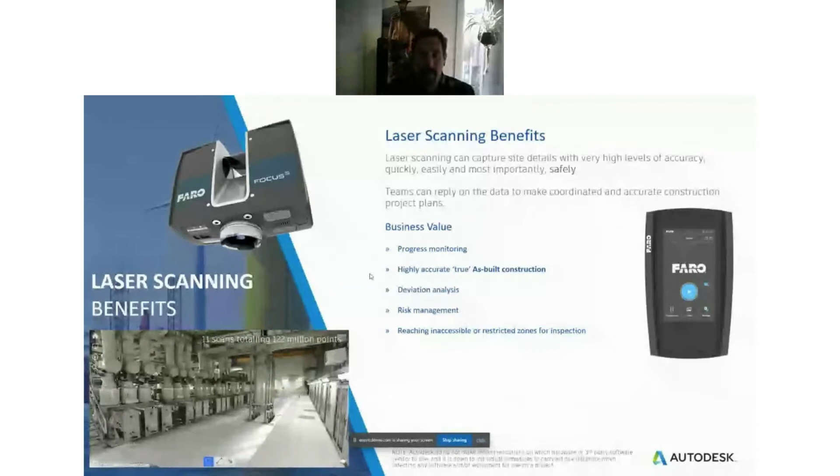Laser scanning, I do a lot of that myself. I've been doing that for years. Very, very accurate. So if you want to do design versus as-built accuracy, laser scanning is key for internals. But it is time consuming, not as time consuming as traditional survey methods by any means, but you're talking 4 to 8 minutes a scan. And then you have to stitch all those together, and it creates huge amounts of data that you then need to process. But again, right tool for the right job.

That is super efficient. The other thing is I don't have to be on site to do that survey. I can be outside of the site, therefore I don't need to do a site induction. I don't need to go through all the safety protocols, high vis, or having a responsible person go around with me. I don't need a surveyor to go with me as long as I know where the ground control points are, so I can do it remotely. So it's not only time saving, but it's also improving health and safety, and you can see the business benefits there.

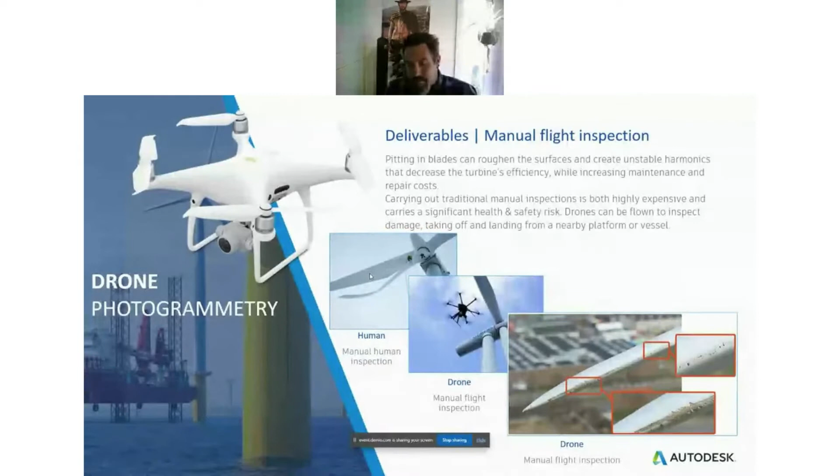A benefit of DroneDeploy and software like that is I can pre-plan a flight before going to site, and simulate it to make sure it will capture what I want. It also means if I'm not flying, I can hand it to another certified pilot who can carry out the same flight again and again, capturing the same information weekly so we can do a comparison. It's not manual control, it's pre-planned, which is great.

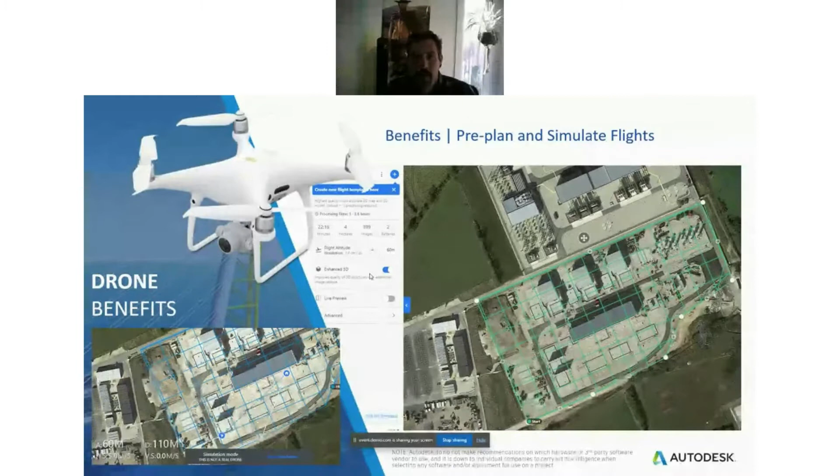You can do progress monitoring, as Jeremy mentioned, the difference day to day or week to week. I'll show that live in a moment.

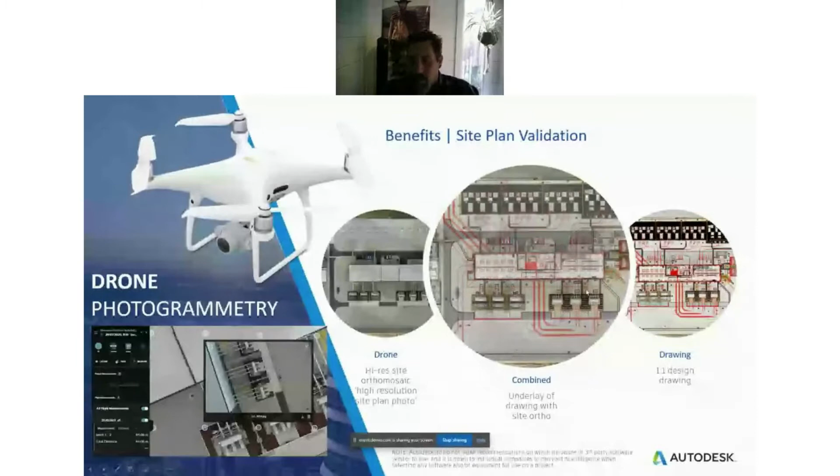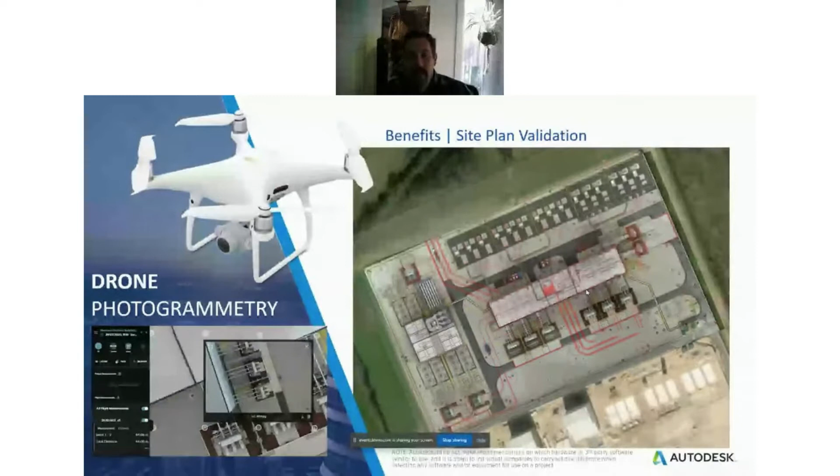Validation as well, uploading the plans. So you have the drone's high-res orthomosaic, you have a drawing, and we can combine the two to see whether what's been built matches the original design data, or if you've got underground services, you can see where they're running into the 3D model.

It's very quick to do site progress and analysis, such as volumetrics. I worked with a company recently where it was a sideline conversation, he'd been out surveying stockpiles manually, taking hours and hours. I showed him DroneDeploy and how quickly you can do this, and he nearly fell off his seat. You literally click around an area and it generates the volumes for you, cut, fill, net volume, etc.

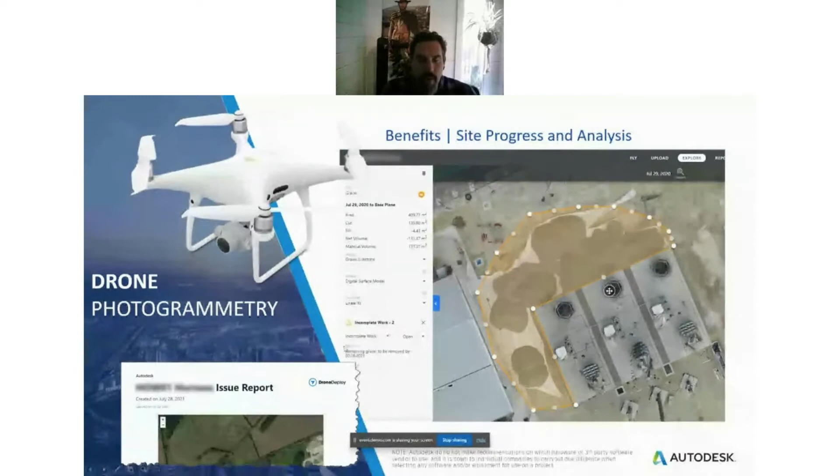You can then assign a particular material, and importantly instigate an issue, say something is incomplete work, and keep it open until it needs to be resolved. You can push all that out as a report. It's fantastic.

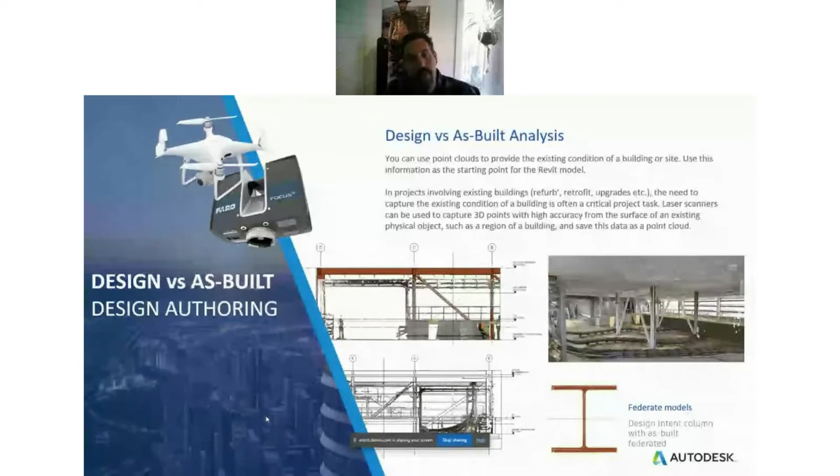Design versus as-built: whether it's drone data or LiDAR, comparing the reality capture with the design intent and what has been built, overlaying it to see deviation. Again, very useful.

We'll have a conversation about where the industry is going, but things like real-time equipment feedback and monitoring, remote controlling of plant equipment, real-time telematic feedback, this kind of stuff. Machine control, so driverless machines, you tell them what they need to do and where, and away they go. This is all controlled, faster, more accurate, with improved operating costs.

I think where this is going is things like drones doing reality capture will start to feed back and update topography, which will in turn feed back to the machine controls for tighter integration and analysis. I really think that's the way the industry is going to move.

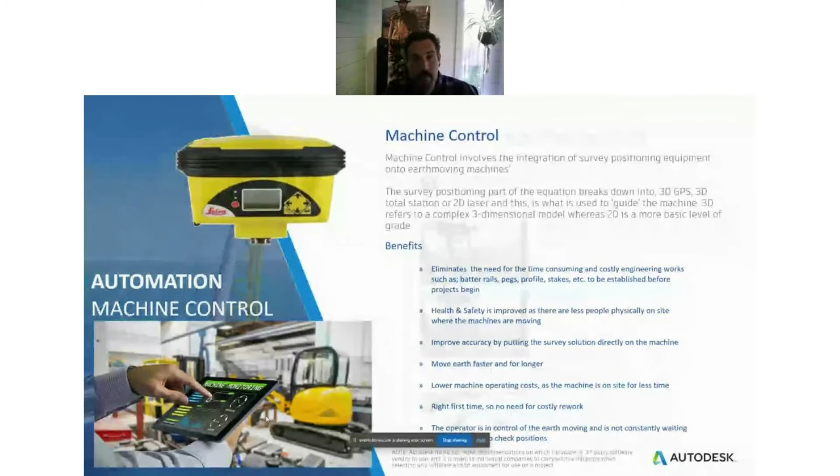Touch briefly on the whole VR thing. Virtual reality is really starting to take off in construction. At the moment solutions require meshes, but through DroneDeploy you can output an OBJ, or download the point cloud and process it in Autodesk ReCap to output as an FBX file. There are a number of solutions out there, like Unity Reflect, where you get the actual site model into a VR headset and everyone can do a virtual tour, reviewing and marking up without needing to go to site. Again, reducing expenses and improving health and safety.

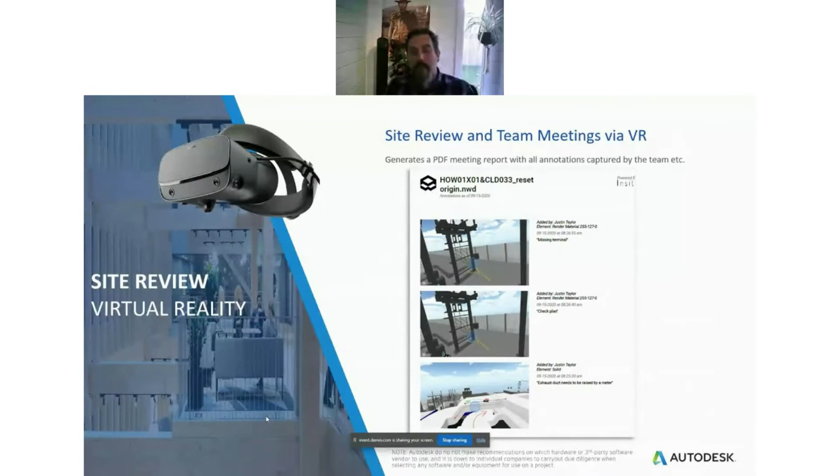I'm going to flip over and show you a couple of live things. This is just one example of a flight I carried out.

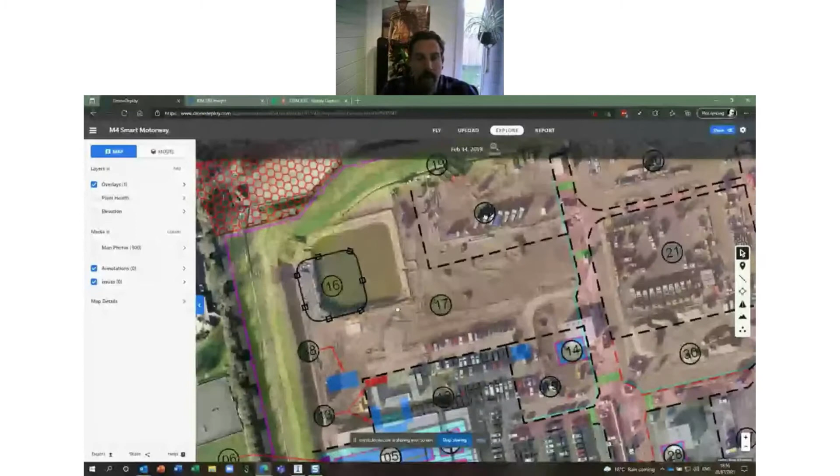You can see this is an actual construction site with the site plan overlaid. Here you can see this catchment pond is completely different to the original design intent. I don't know why, but we can clearly see that if you gave someone this original drawing and told them where that is, and they relied on it, you'd have a pretty big problem.

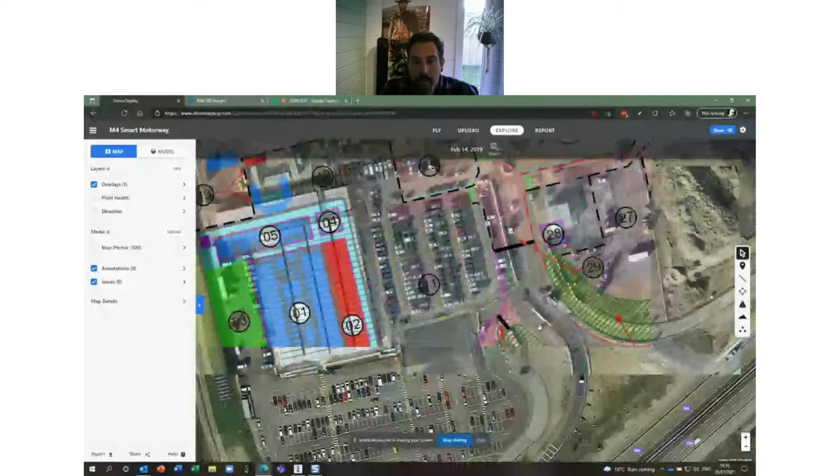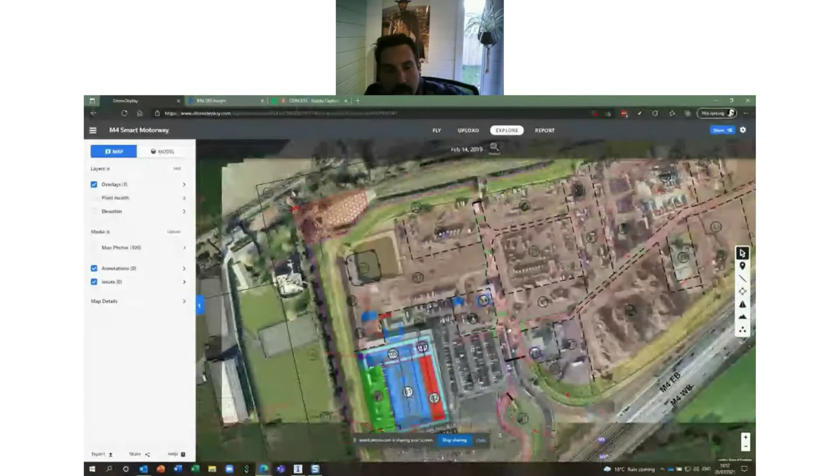Again, down here you can clearly see that this service road is not in the same location. The access is different. The buildings are looking pretty good, but this ability to overlay the CAD data and do a comparison and update, it's really, really powerful.

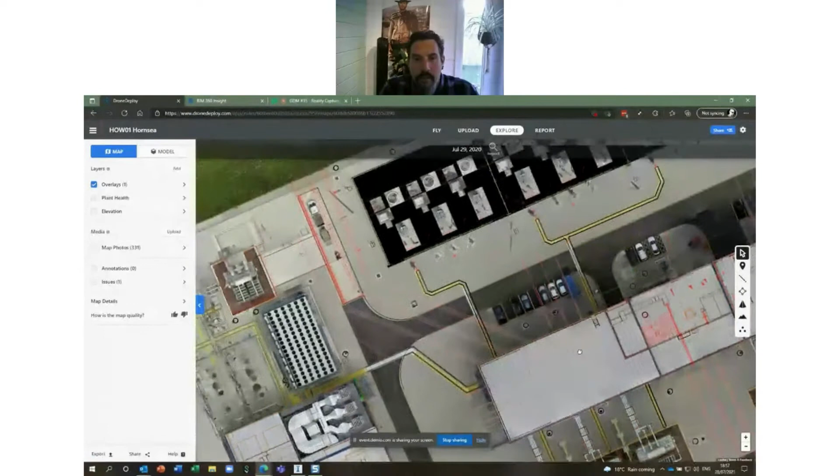Let's just go back to the projects and open this one up. This is that one I showed you earlier. So again, overlaying the CAD data, we can see underground services and how they feed in. You're looking at the high definition ortho mosaic that's been created with the CAD overlay going over the top.

And I mentioned about these volumetrics. In the past, you'd have to go to site, go through induction, safety, maybe have someone go down with you onto site. They may have to stop work in order for you to access something to survey this area. But very easily, we can just draw roughly around here, and voila, we have the volumes immediately. And I'm not joking, that could be saving half a day, if not more. The software can actually monitor this and give you the changes on a day-to-day basis as well. So huge cost savings, huge impact on improving health and safety.

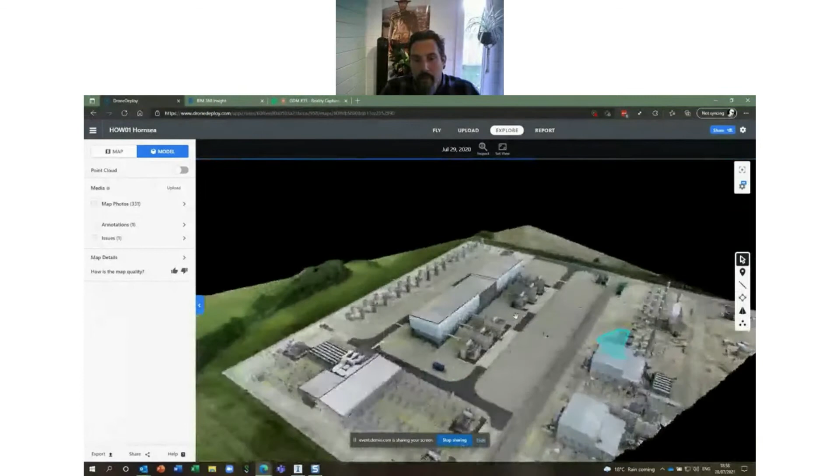The model itself, again, if I switch into here, it's producing this mesh. So it's processing the photos and generating this mesh, which I can download and put into my VR and walk around it, giving people a true site walk down in context, never having to step foot on the site, which is great.

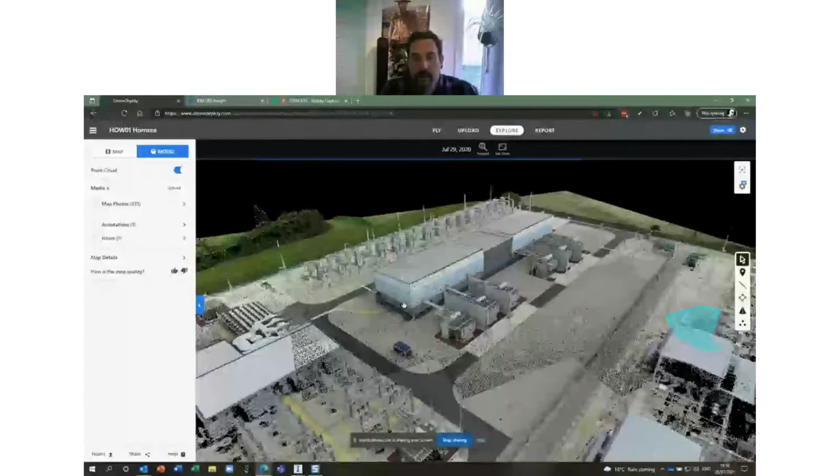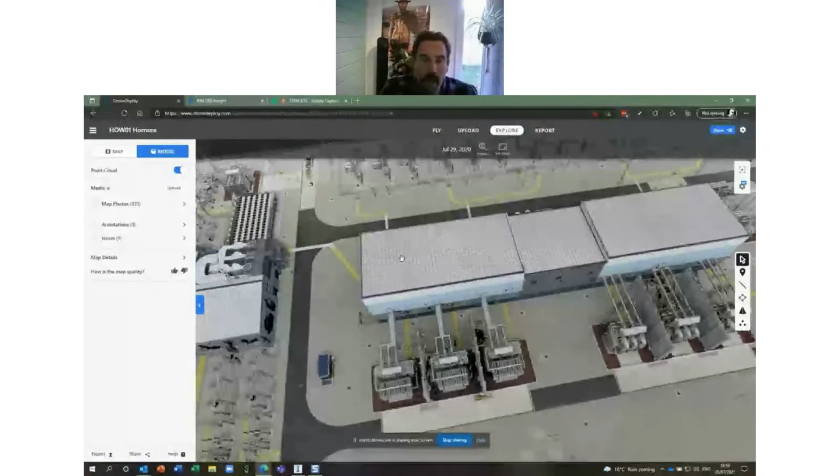And we also have access to the point cloud information, which again I can download and reprocess in something like Autodesk ReCap. Why would I want to do that? Well, I've scanned the internals of these buildings using traditional LiDAR, but I did not get up onto the roof. To do the LiDAR of this roof, you'd either need to put scaffolding up, climb up on top, but then you've got health and safety issues. You might get a cherry picker, but it's expensive and time consuming. So what I can do is simply merge the drone point cloud with the terrestrial laser scan point cloud and generate a complete survey very, very quickly.

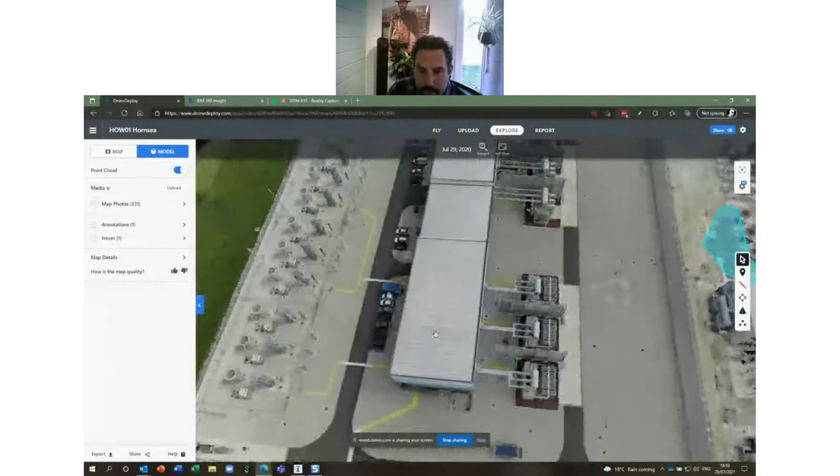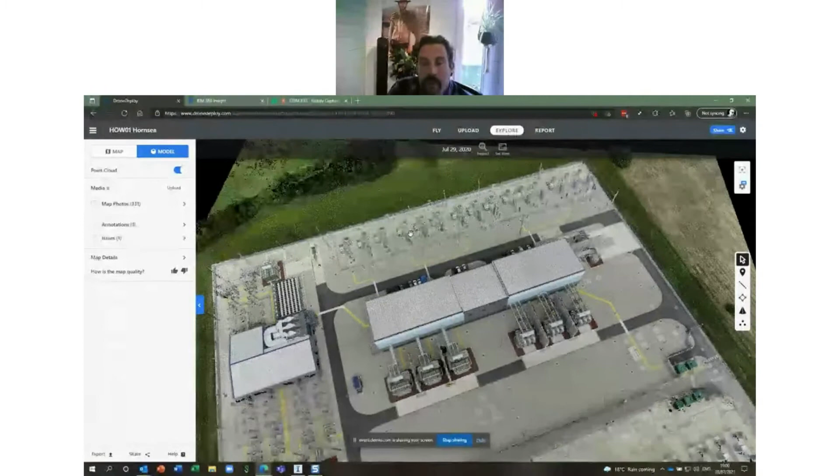This site, just out of interest, is a power station, actually for the wind farm. So we're talking about incredibly high voltage going through here. Anything that happens on this site requires a huge amount of induction and safety, locking off areas, shutting down different zones. And to shut down a zone to carry out any form of inspection is incredibly expensive, as you can imagine. So once again, this was flown outside of the actual site itself, required no induction, it just needed approval to fly over, which we got.

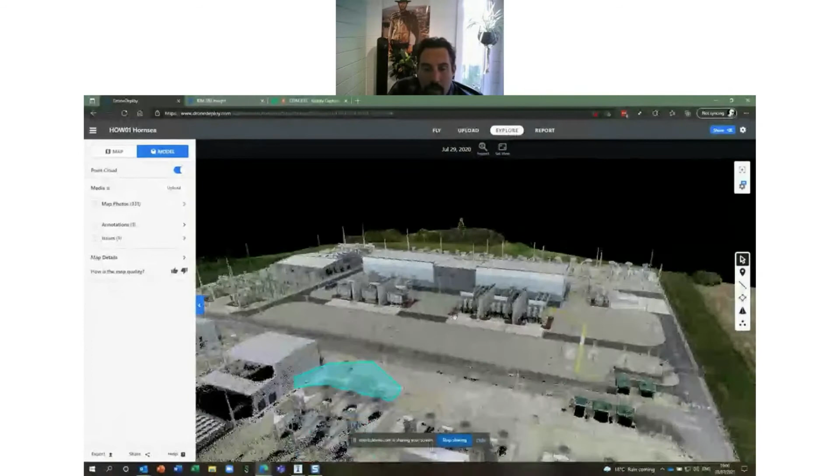And again, bypassing all of that red tape in order to get this information is absolutely critical.

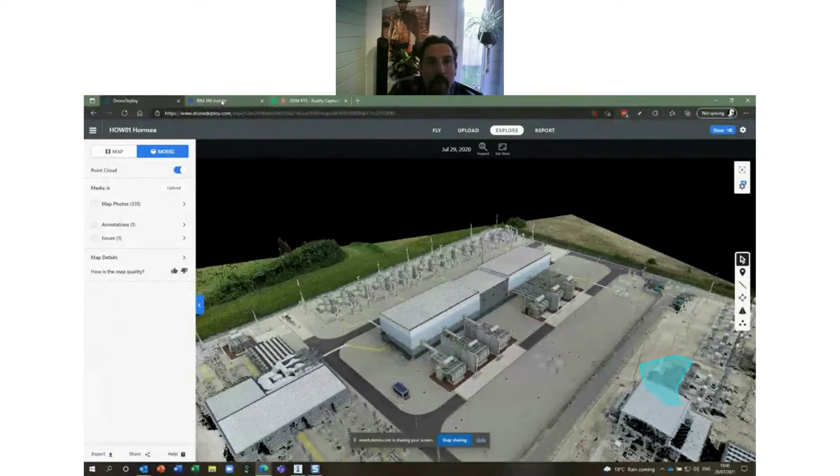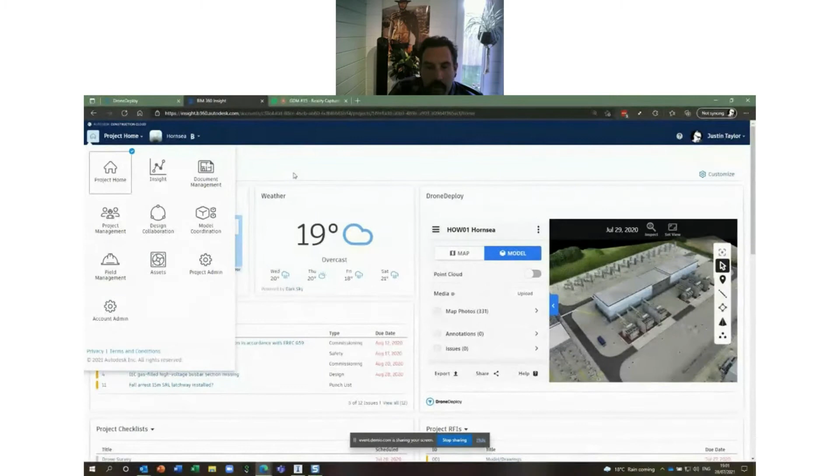So yeah, the combination of the DroneDeploy software and what we can do with it, there's a couple of things from the Autodesk aspect. I've mentioned Recap Pro already for processing, but if any of you are using our cloud-based solution, BIM 360, it's a great tool for working in construction. It's a common data environment, it does field management, project management, model coordination, all of these things. It's where you host all your models, your CAD models, and your documents, Word documents, Excel spreadsheets, photos, etc.

But on the project homepage, this dashboard is customizable, and we have these things called partner cards, which I can go and add. You can see I've added the DroneDeploy partner card into this particular project and linked it to the DroneDeploy project for this site. What that means is, as a user, I don't have to go out to the DroneDeploy site and back in. I can stay within one environment and access exactly the same information. So there's the 3D model. I can go look at my annotations and my issues and turn them on and off. I can do my volumetrics. I can go look at the map with the CAD overlay, etc. This is really powerful for the users, as you can imagine.

Now, I mentioned about creating a construction information model. Another piece of software which I think has huge potential within the construction industry is one of our infrastructure solutions called Infraworks. I'll just quickly show you.

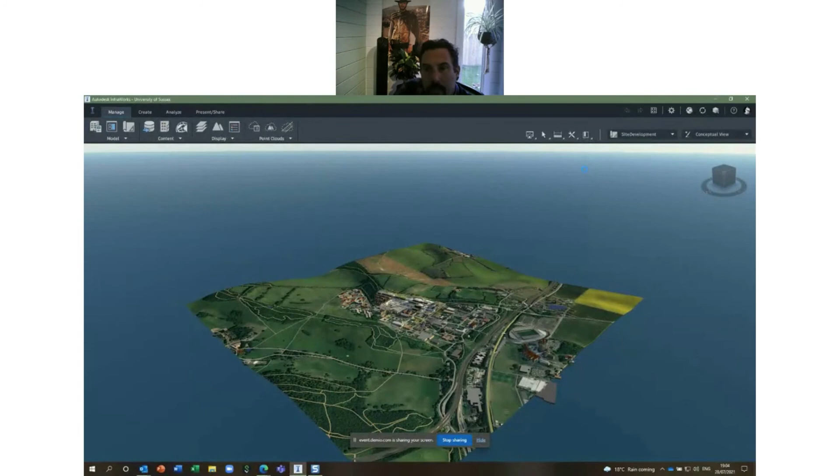Okay, here we go, I'm just going to switch to the master. You can create different scenarios, as many as you want. This is what InfraWorks created with no input—you get a basic terrain, basic shapes for buildings with the right height coming out of OpenStreetMap, and real roads that you can go and edit.

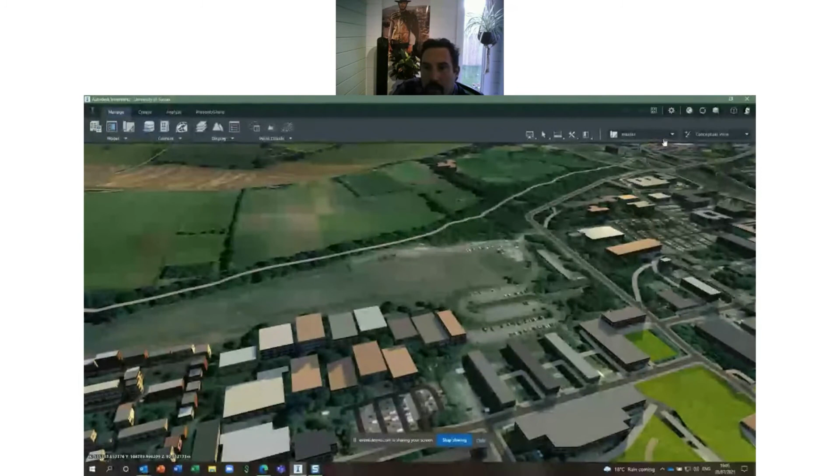But this is where the work was being carried out—on a fairly steep slope, with new buildings and new residences going in. What we did, and it made a massive difference to the entire construction process, is we went out on a weekly basis and flew the drone—again, probably a 20-minute flight, 2 to 3 hour processing time.

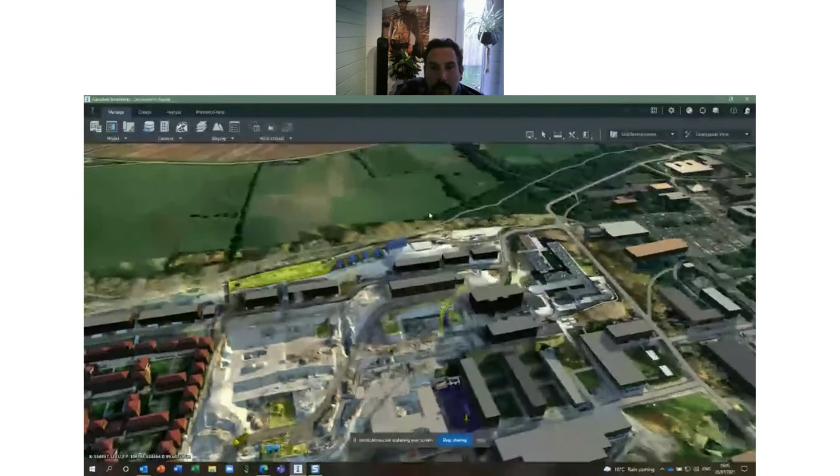We bring the point cloud into InfraWorks, and the point cloud can be used to regenerate the topography. So instead of being points, a point cloud, it's actually updating the InfraWorks terrain accurately, and it's also laying the ortho mosaic over the top. So you get this very detailed construction model in 3D.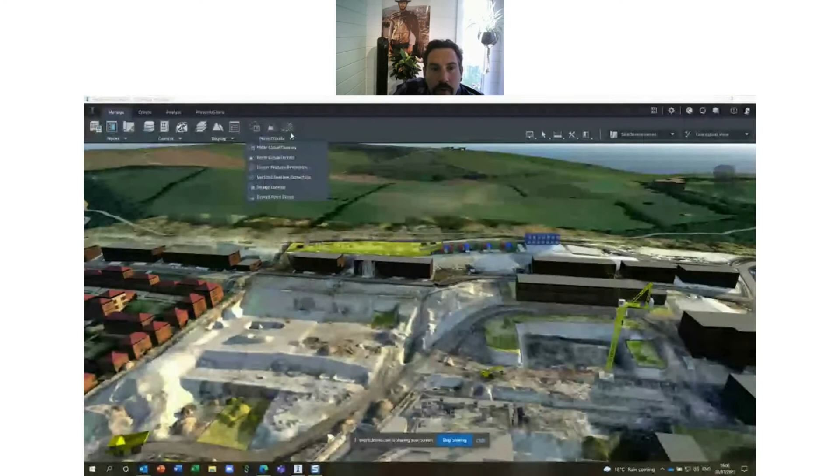It will also do feature extraction—linear feature extraction. So if it finds a road, a curb, a railway, trees, or street signs, etc., it will actually convert those for you as well.

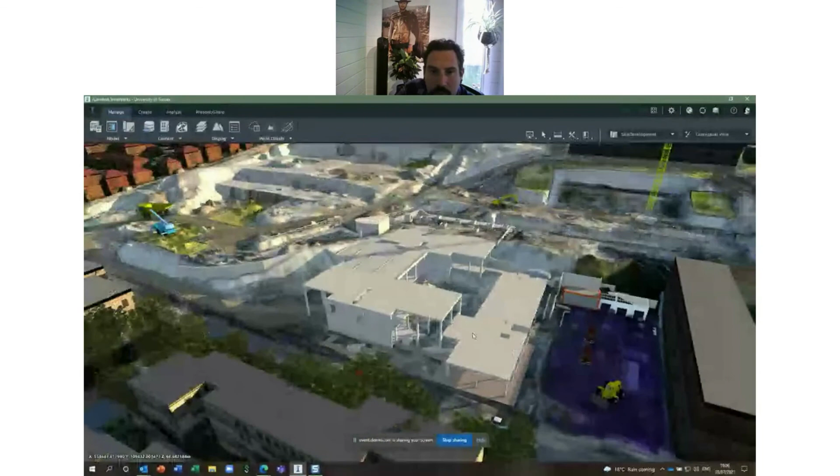But what we then did, you can see here—we mocked up the site cabins, we mocked up an access road, and we've got the real design model starting to come in. Obviously this is just a structure, but it's accurately positioned. We were able to then locate...

the tower cranes, material handling areas, and do things like calculating line of sight as well—whether the lorries coming in were going around blind corners, what the gradient was, all of this kind of stuff.

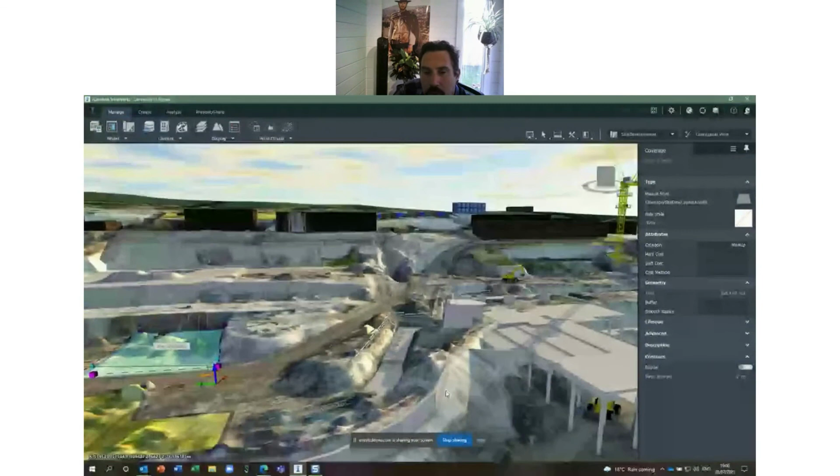This gave the workers during their regular morning meetings a much greater context to talk about potential issues and areas of concern, over and above when they were previously just working with a 2D plan marked up in a traditional way.

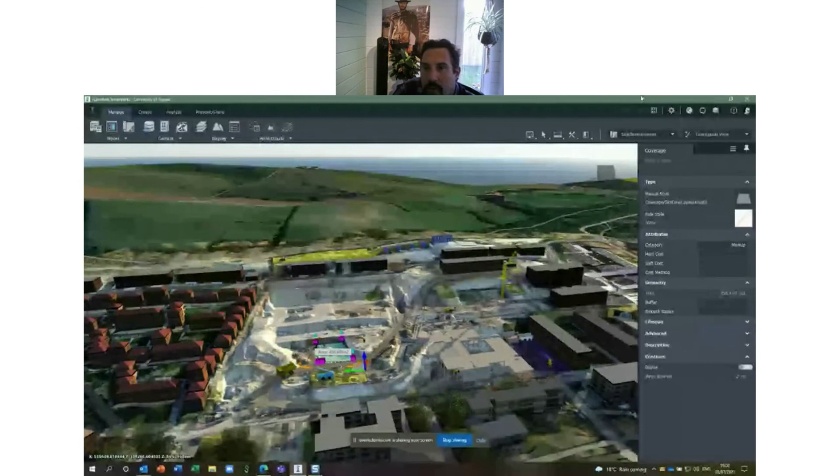So I don't know how I'm doing on time—I seem to have talked quite a bit. I think I'll leave that there, and again, I'm happy to take questions. Hopefully that was a good brief insight.